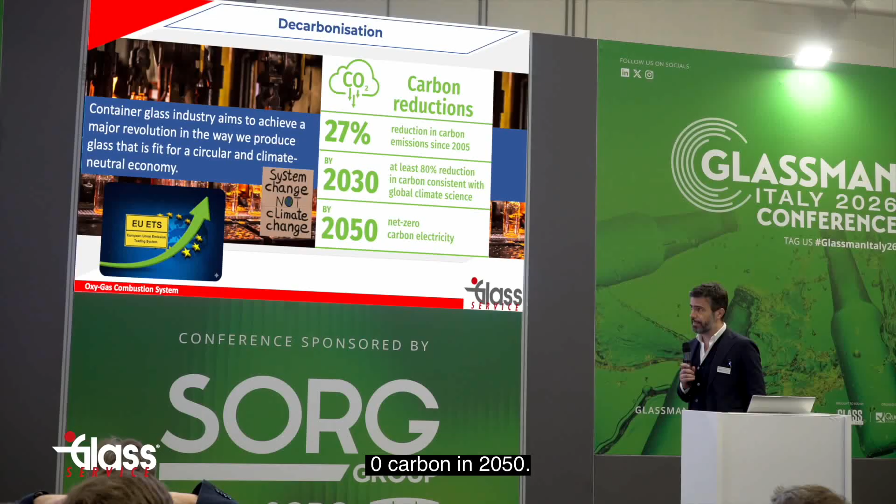Decarbonization is the word that today, of course, you know. We have two very ambitious targets: one is by 2030 to reduce CO2 emissions by 80%, and the other, very ambitious, is to become net zero carbon by 2050.

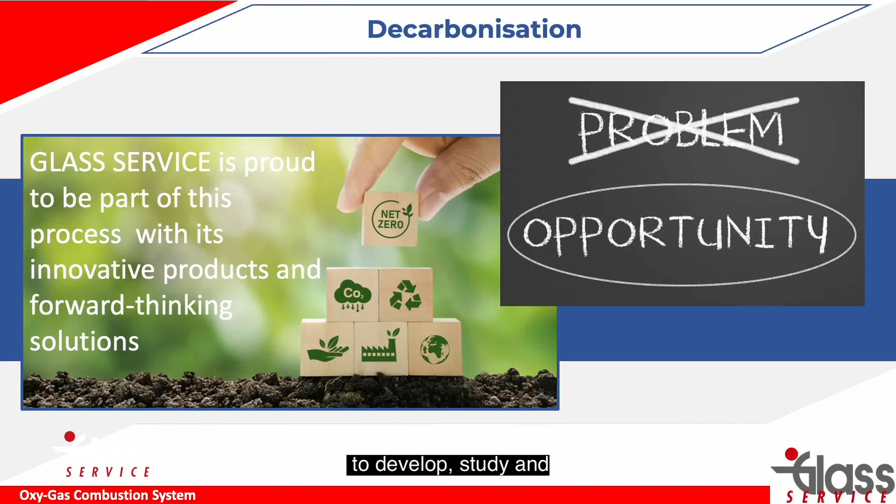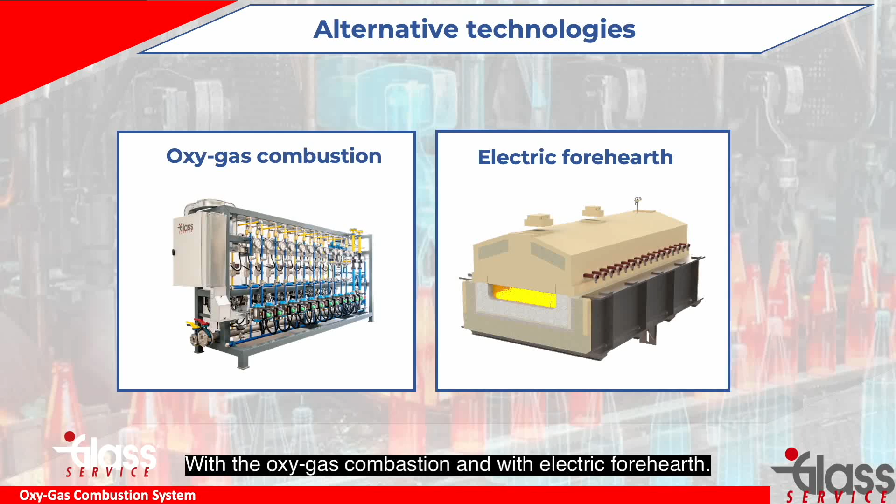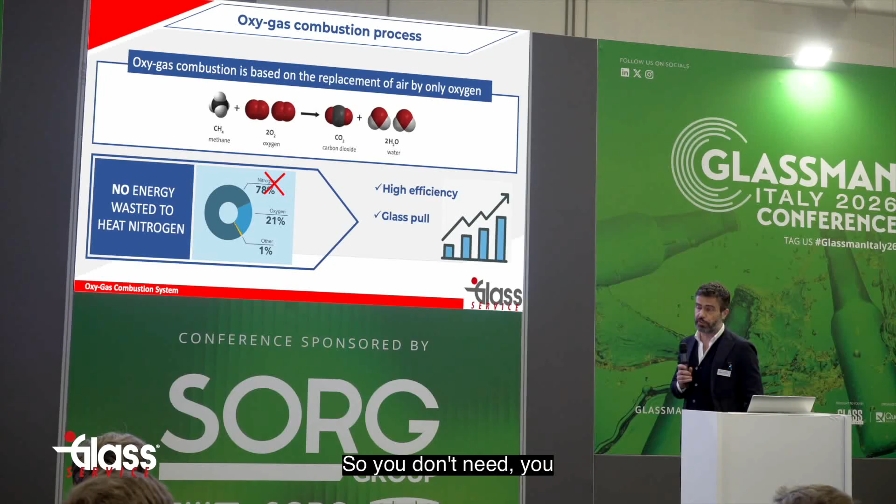Glass Service, from what is a problem, started to develop, study, and deliver to its customers this product, finding an opportunity with oxy-gas combustion and electric Forehearths. The oxy-gas combustion basically consists of an easy chemical reaction where air is replaced by oxygen, so you don't waste energy heating the nitrogen that is present in a big percentage, 78%.

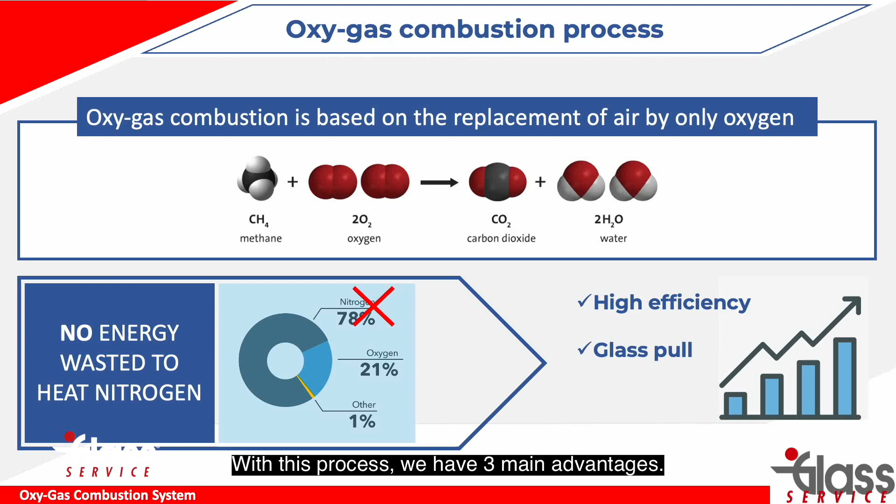With this process, we have three main advantages. The consumption of gas is reduced up to 60%. We almost have no NOx, and the emissions of CO2 are reduced by up to 60% at maximum.

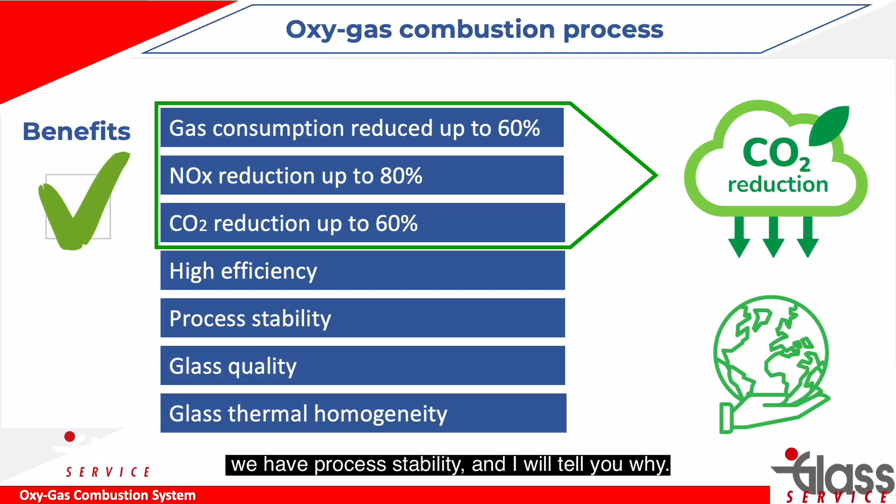At the same time, we maintain the same quality standards, because at the end the customer wants the quality of the glass he produces. So we have efficiency, process stability, and glass thermal homogeneity. All these mean glass quality.

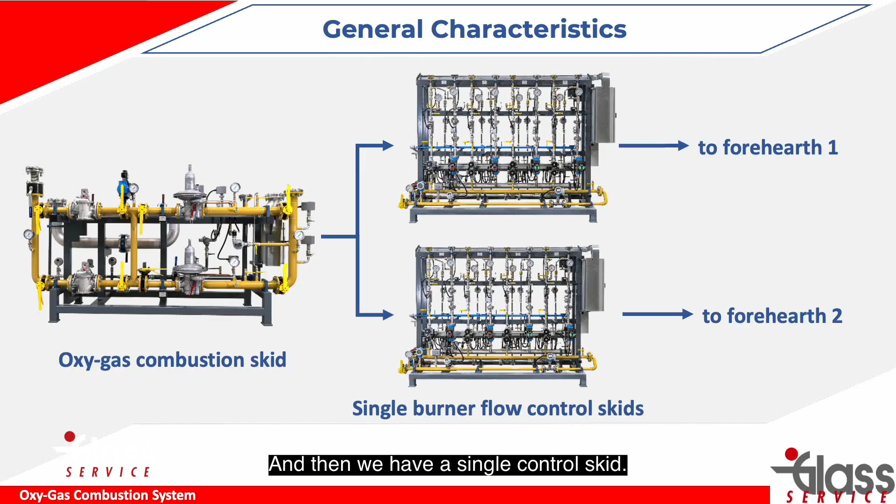Just to talk a bit more technical, I will show you how our systems are composed. We have a first skid of pressure reduction and safety for oxygen and gas, and then we have a single control skid. I mean, we can control independently the flow in any Forehearths and in any zone of our Forehearths.

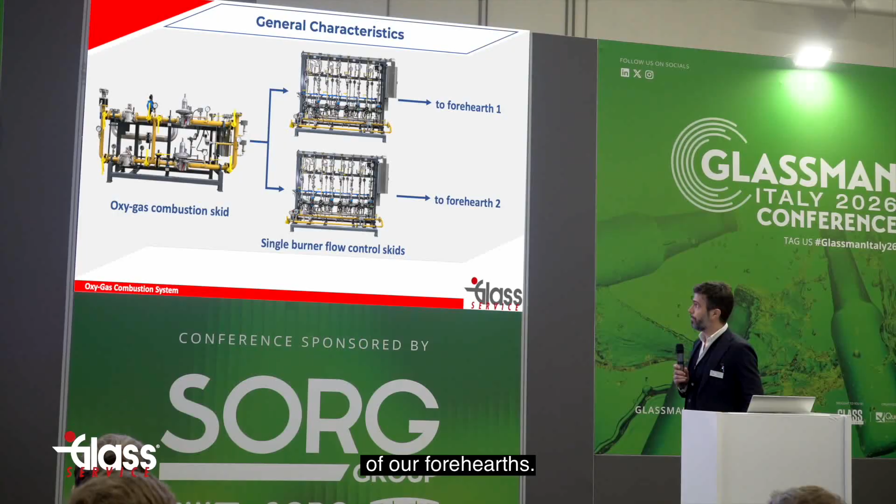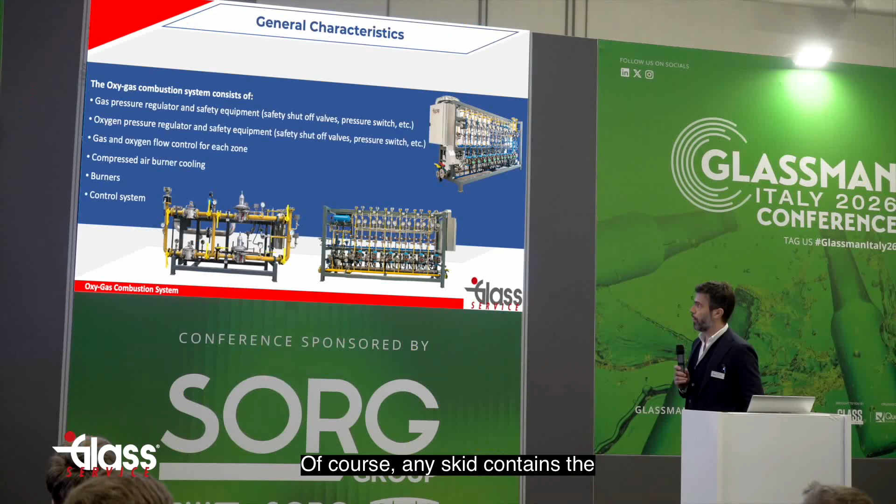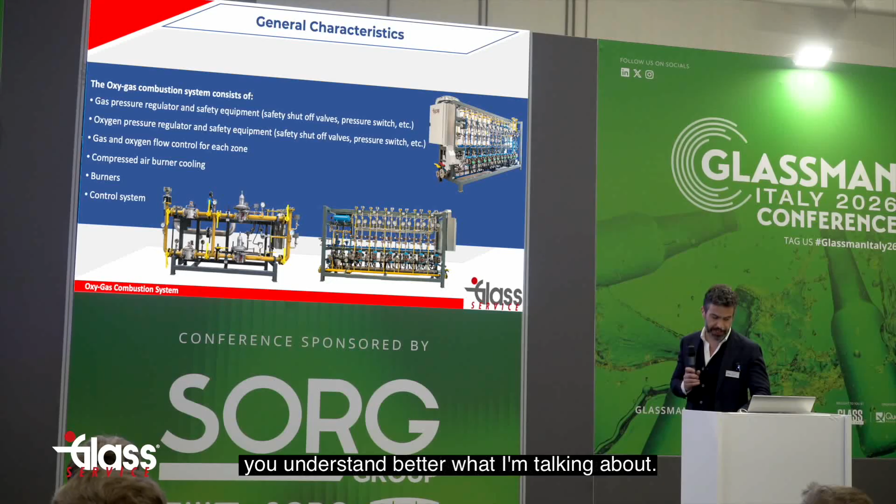In this picture, we have just a more graphic configuration. Of course, any skid contains the main devices for regulation, safety, and the dedicated control system. These are just pictures to help you understand better what I'm talking about.

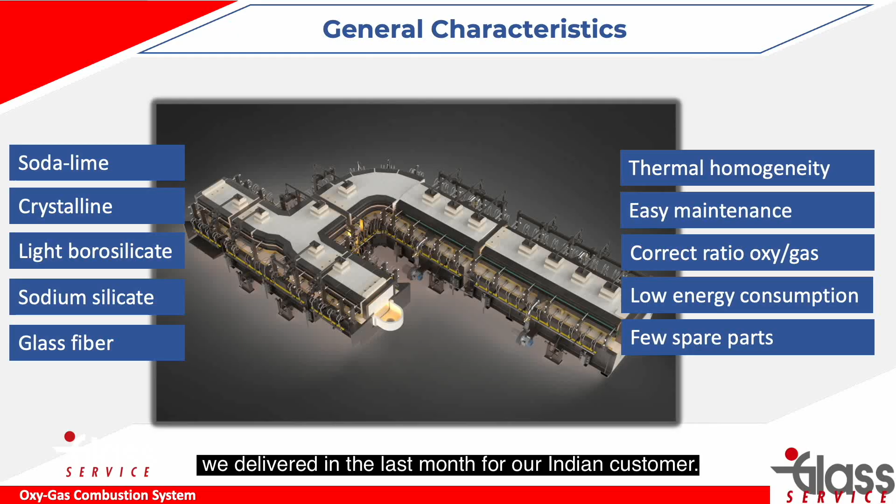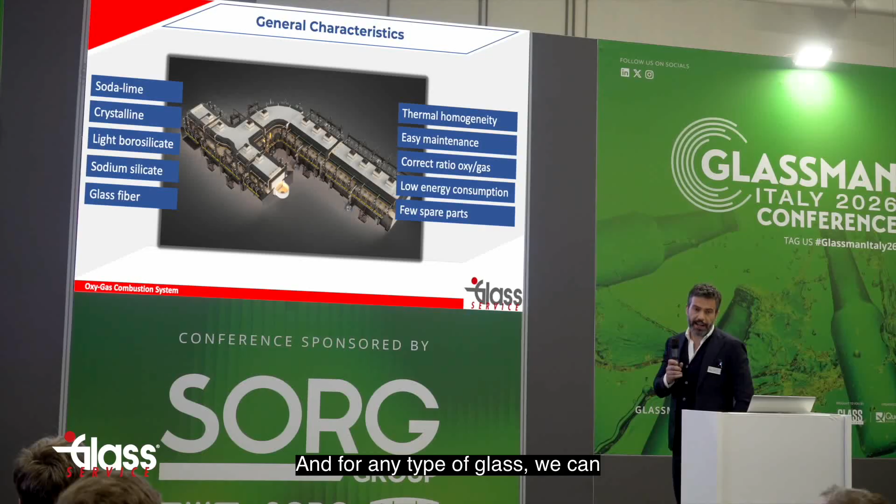This is a rendering of a real Forehearths that we delivered in the last months for our Indian customer. This process is applicable to any kind or type of glass, and for any type of glass we can maintain the same quality requirements.

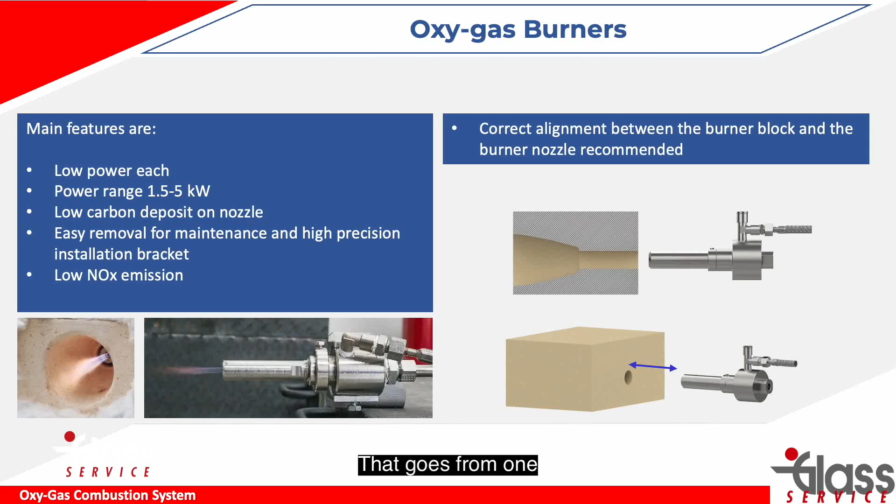Look, these are the burners that we use in the Forehearths. They are easy to install and maintain, and the main characteristic is the low power. They go from 1.5 to 5 kilowatts, and across the whole length of the Forehearths you have a lot of these low power burners.

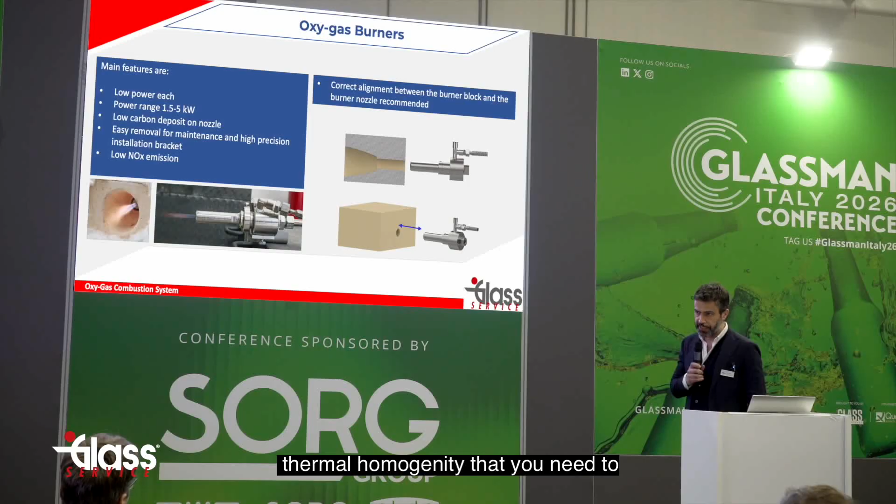Why? Because in this way you can have the thermal homogeneity that you need to get the best quality of the glass.

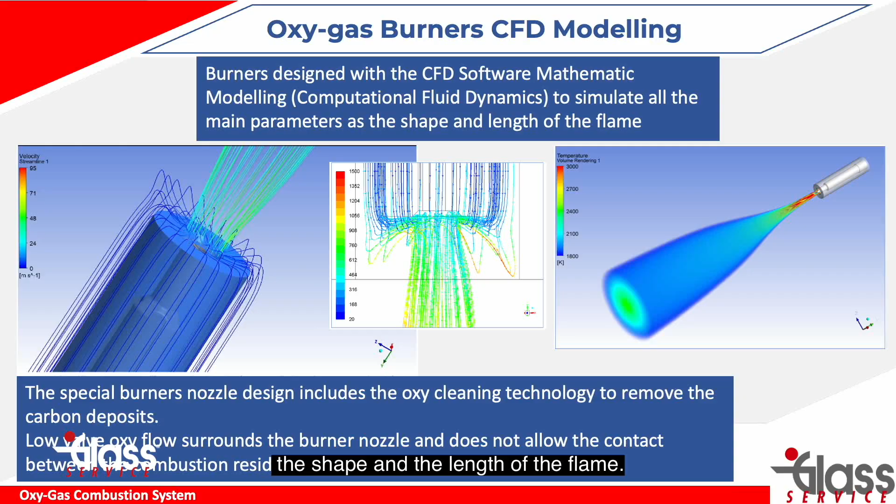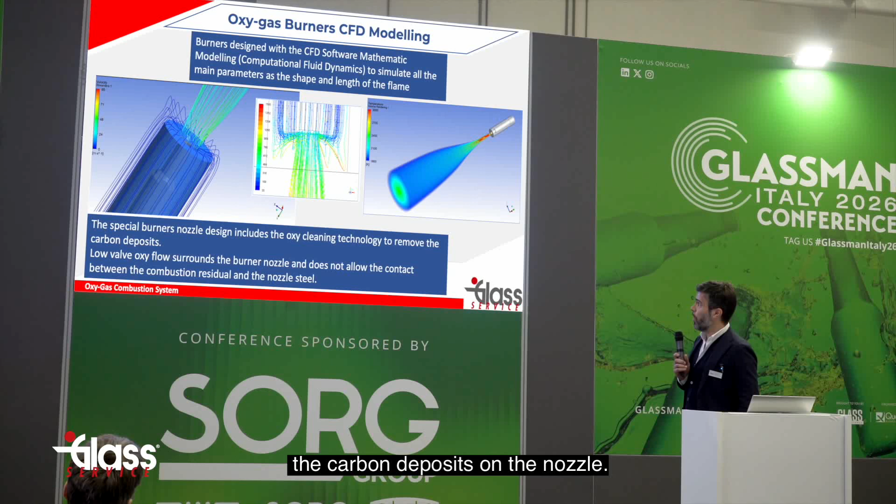We designed these burners with computational fluid dynamics, where we can simulate the shape and the length of the flame. One nice characteristic is we can remove the carbon deposits on the nozzle, so we have a clear nozzle and good performance of the burner itself.

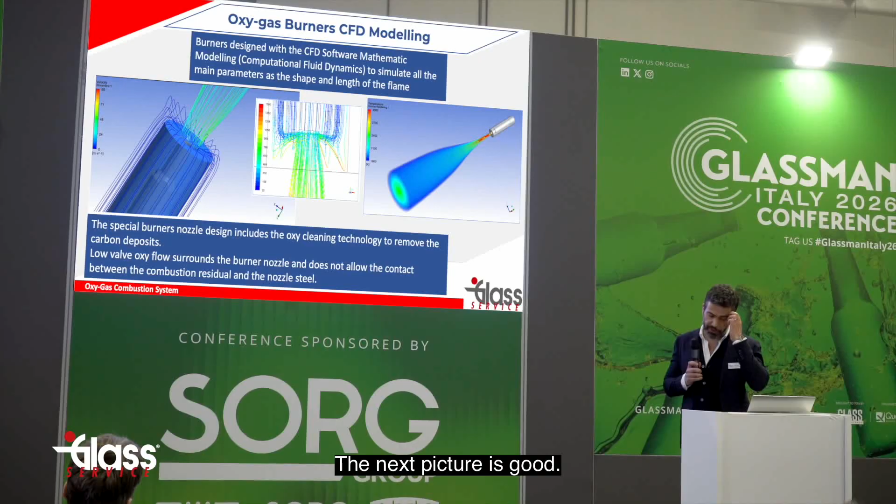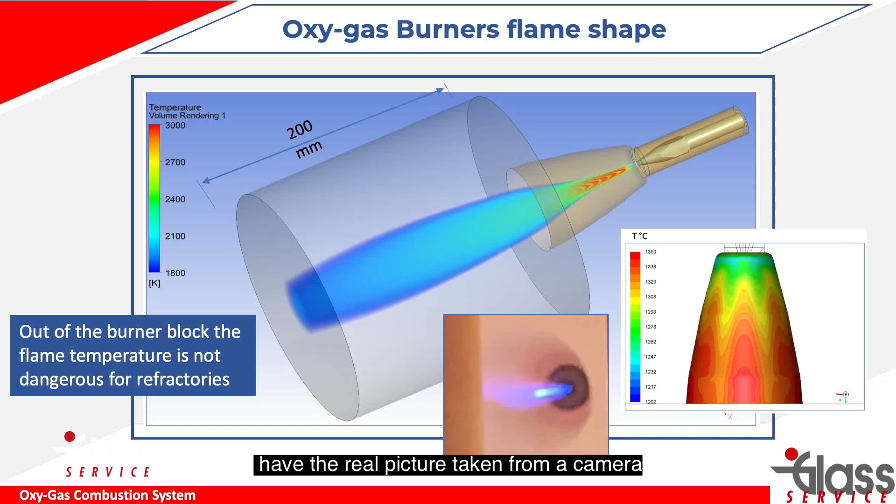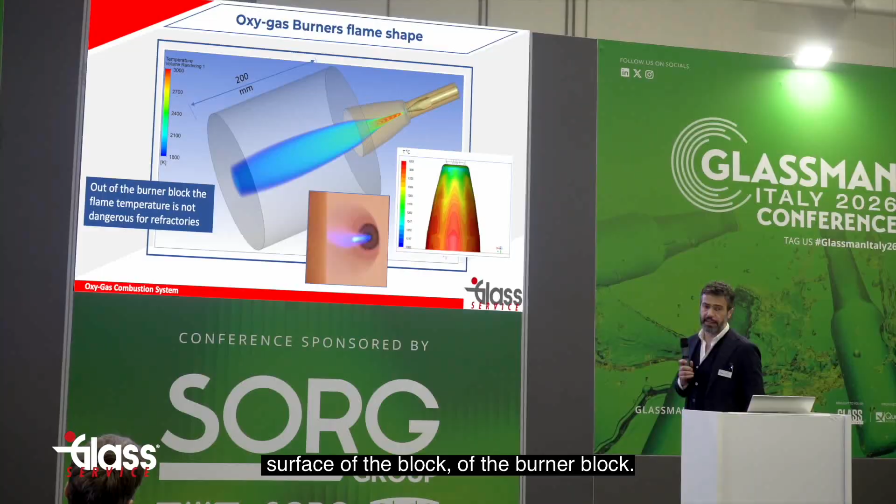In the drawing, you have the simulation by the computational method. Below, you have the real picture taken from a camera inside the furnace. As you can see, the flame is completely the same as we simulated by the computational method. First of all, it doesn't attack the surface of the burner block.

Now I want to tell you some numbers, because at the end that's what matters to our customers. They want quality, they want to make production, but they also want to make money at the end.

Here I took one standard Forehearths, K36 width, 3 zones, 8 meters. Approximately we have 130 low power burners, as I showed before.

Please consider these numbers like an idea of what you can get and what you can save. There is a comparison between the standard combustion with air and gas against the oxy-gas.

Considering the mentioned Forehearths and the cost of gas, we have approximately 100,000 in a year. Using oxygen, we save — I put 55. So just to be more realistic, the consumption of gas is reduced to 15. The consumption of oxygen is double, as you saw in the reaction. There is a mistake — it's not a euro, it's a quantity of gas per hour.

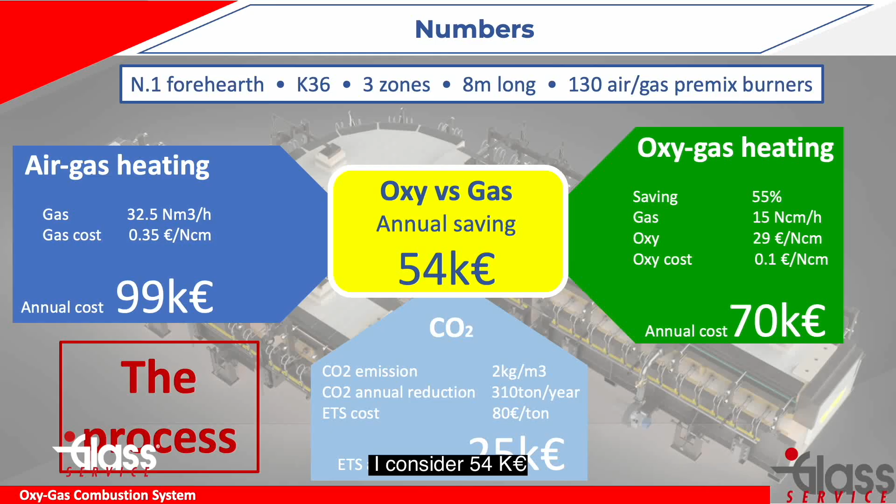In some countries, we need to consider the cost for every ton of CO2 emitted. With these quantities, I considered 25 kilo euros, which needs to be considered an additional saving in some countries.

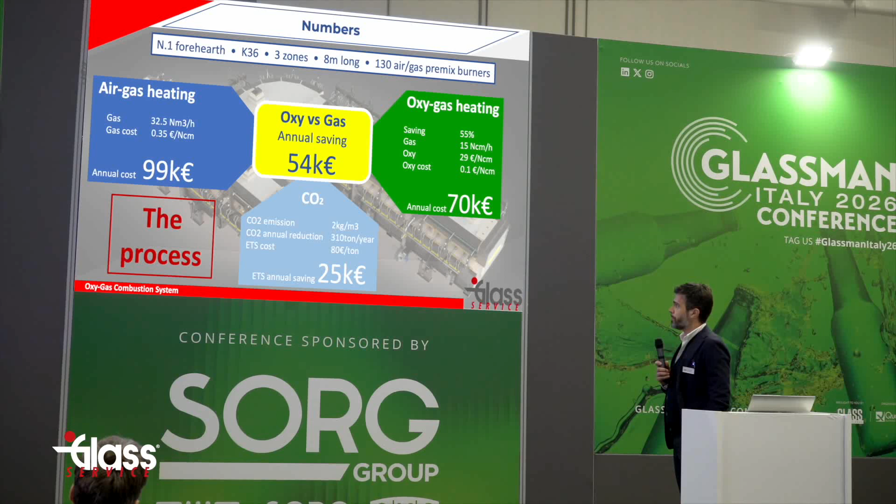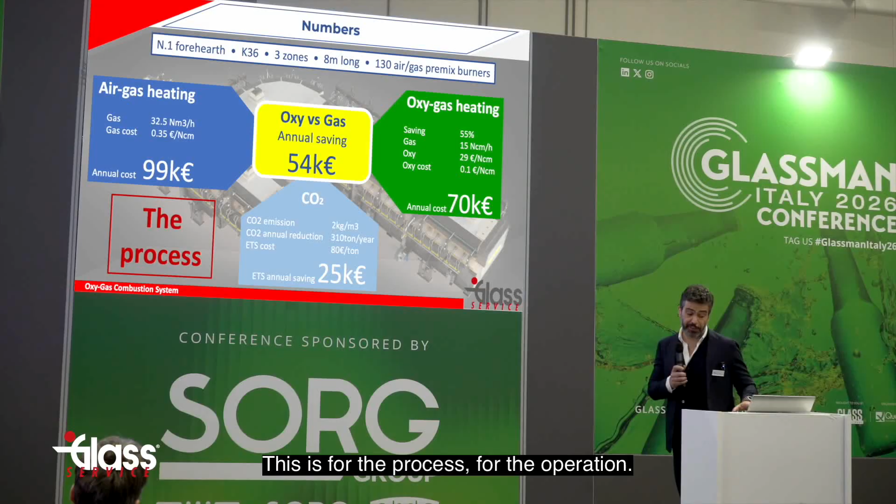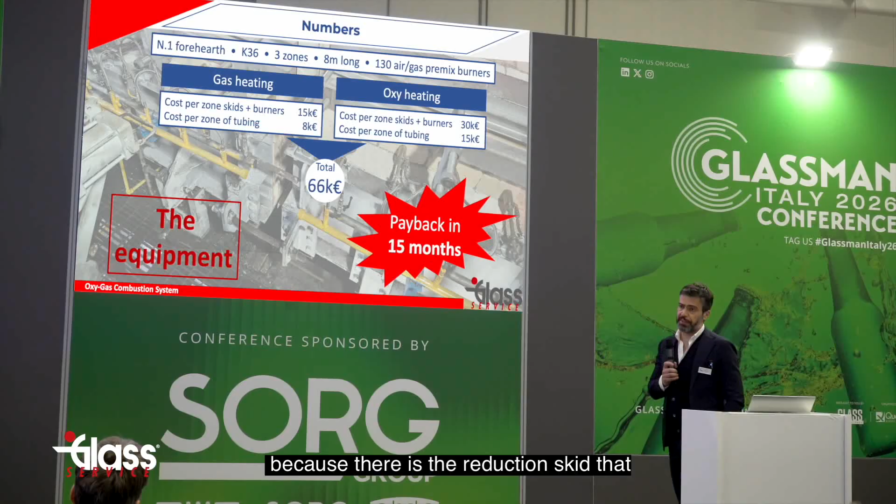So with this process, we are approximately at 55,000 euros — this is for the process, for the operation. But we have an additional cost for the structure, because there is the reduction skid that is more expensive. We have different devices, different regulation, independent regulation for every Forehearths, so the cost is higher.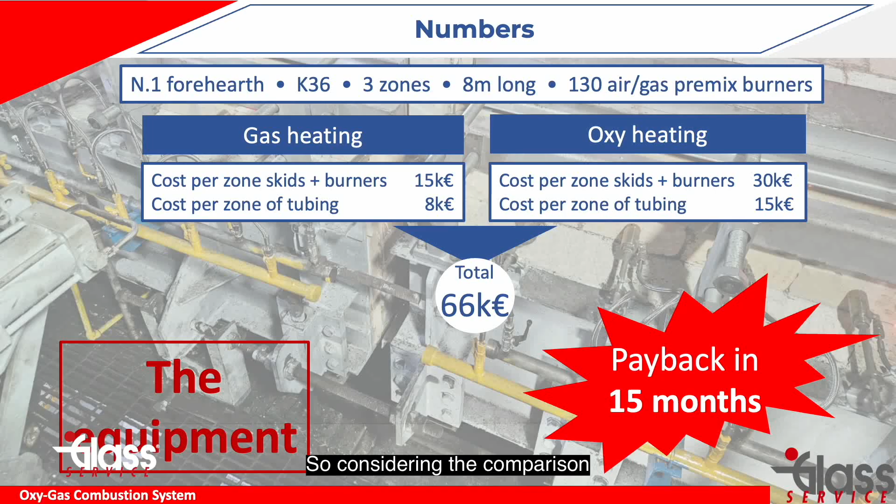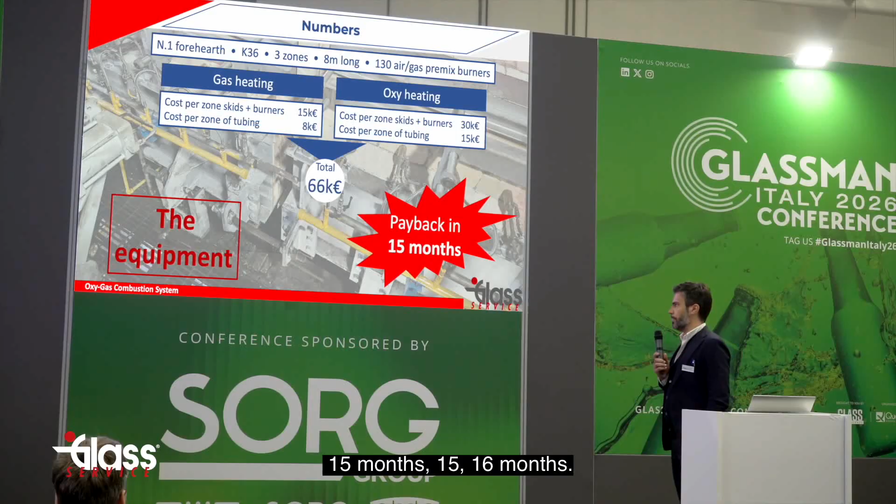I just say that we calculated this at 66k€. So considering the comparison with what you save, with this process you have a payback in 15 to 16 months. We can consider this a success because there is no other solution that can give you this payback in so little time.

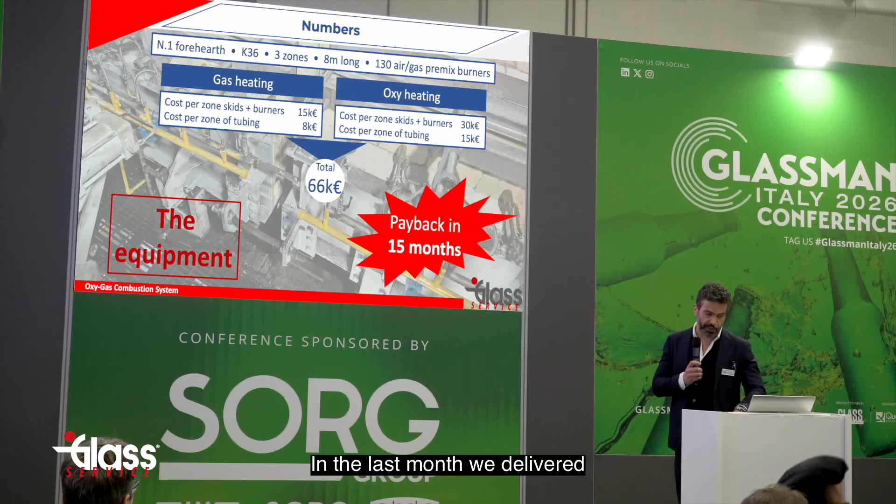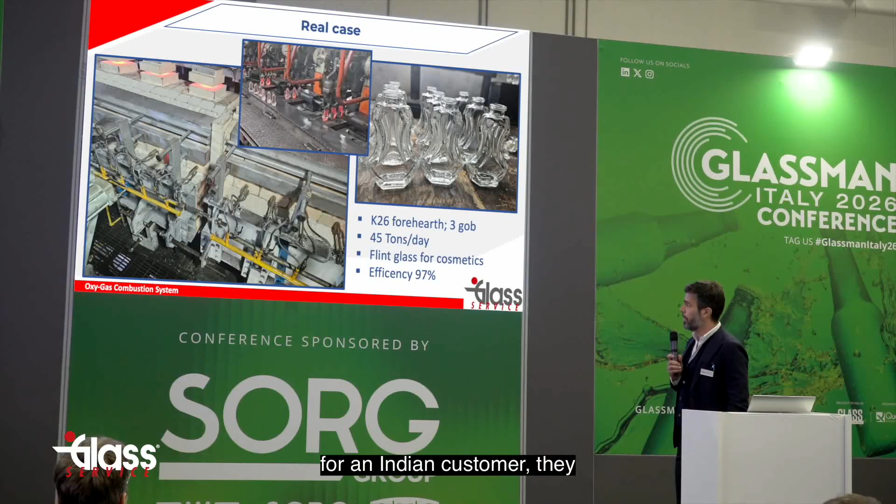Okay, this you could say is theory. In the last months, we delivered one Forehearths — we converted one Forehearths to oxy-gas combustion for an Indian customer. They are producing 45 tons per day with flint glass, and they recognize that there is this advantage.

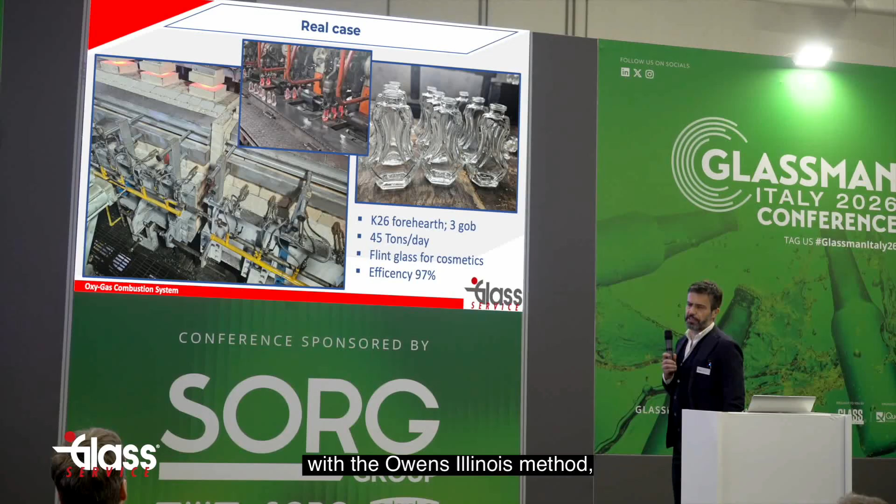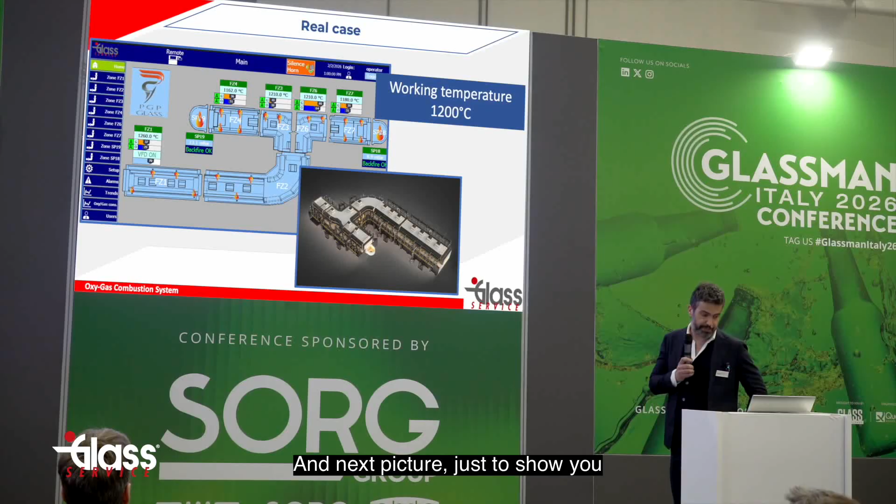They also calculated, with the Owens-Illinois method, an efficiency of 97%, which is fantastic, I think. In the next picture, I'll show you the working temperature of this process and the homogeneity of the temperature in the distributor and in the first part of the Forehearths.

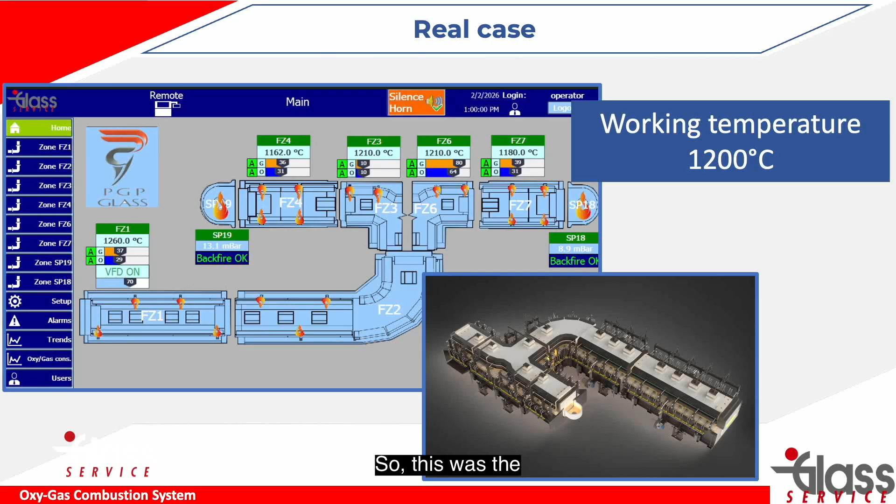So this was the first product for the CO2 emissions. Now I'll leave you the time with my colleague. Thank you.